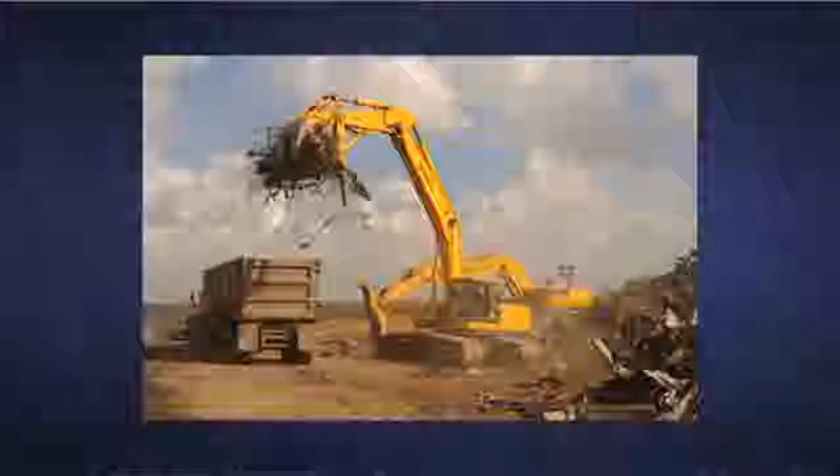Was the structural steel from World Trade Center 7 preserved, documented, analyzed according to standard procedures for investigating engineering failures? Hailing the collapse study as an assessment rather than as an investigation has allowed valuable evidence in the form of the tower's structural steel to be destroyed. It is a steel that holds the primary key to understanding the chronology of the events resulting in the collapse.

When did you become aware that the steel from the World Trade Center was being sold off? I think it was on the order of a week or so before we arrived on site, on October the 5th, I believe it was. So in other words, the city was selling or was disposing of material within 2 weeks of the actual event?

I believe I was the first one to find out that the steel is being recycled. New York Times reporter Jim Glanz told me 2 weeks after the collapse, and I tried to contact the city, and also New York Times reporters tried to make sure we could have access to the steel to do research. It was not happening. I just think there's so much that has been lost in these last 6 months that we can never go back and retrieve, and it's not only unfortunate, it's borderline criminal.

400 truckloads per day of material were taken away from the World Trade Center site and sent to China for recycling. There were laws violated in the destruction of that evidence. And for the American Society of Civil Engineers to ignore those events is extremely disturbing and is a violation, in my opinion, of their professional code of ethics.

It was contrary to the way all investigations are done. If an airplane crashes, they seal off the entire area, nobody touches anything, they move it to a secure location, and they reconstruct an aircraft. Normally, when you have a structural failure, you carefully go through the debris field, looking at each item, photographing every beam as it collapsed and every column where it is in the ground, and you pick them up very carefully and you look at each element. We were unable to do that in the case of Tower 7.

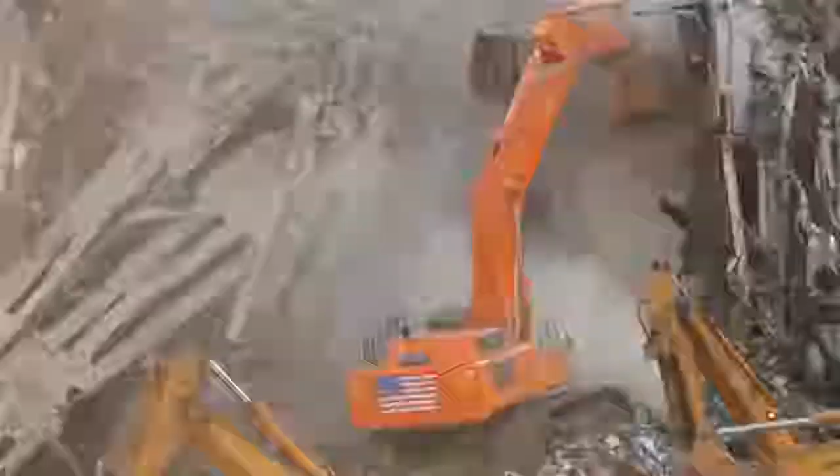We have preservation of evidence, we have spoliation of evidence, there's all kinds of basically standards that you don't destroy evidence. We don't have the real story on what happened because there wasn't a proper investigation done.

As reported by the New York Times, engineers were baffled by the collapse of Building 7. Since no steel frame high-rise has ever completely collapsed due to fire, how are we to understand this mysterious event?

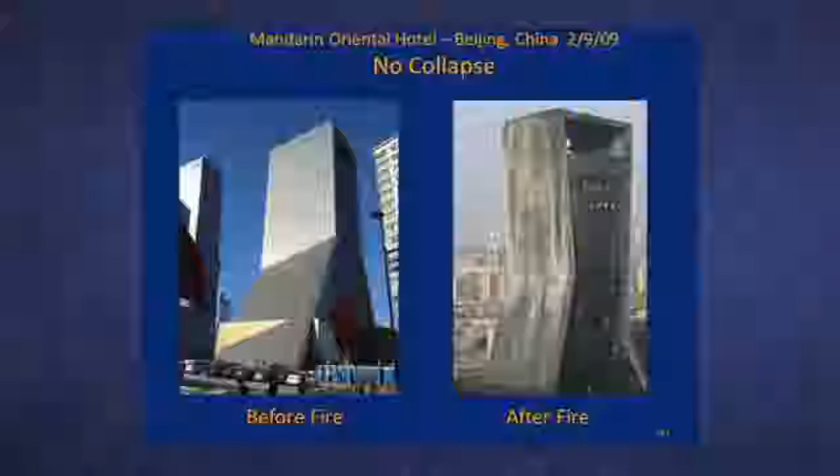High-rise buildings simply do not collapse due to fire. There has never been, until 9/11, an experience where a steel frame high-rise building completely collapsed. There have been fires that burned longer in similar structures without any collapse.

It's not that steel melts in a fire. In fact, normal fires are not hot enough to melt steel. Even if you were to use an unusual fuel like kerosene, you cannot achieve temperatures hot enough to melt steel. But what happens is it starts to lose its strength, and as it loses its strength, it starts to sag.

In my previous career as a firefighter, normally you'd never be afraid to go into a Type 1 building because they're not combustible, and you would just charge at it and put the fire out. Never in my training were we ever taught that these types of buildings could just collapse in on themselves.

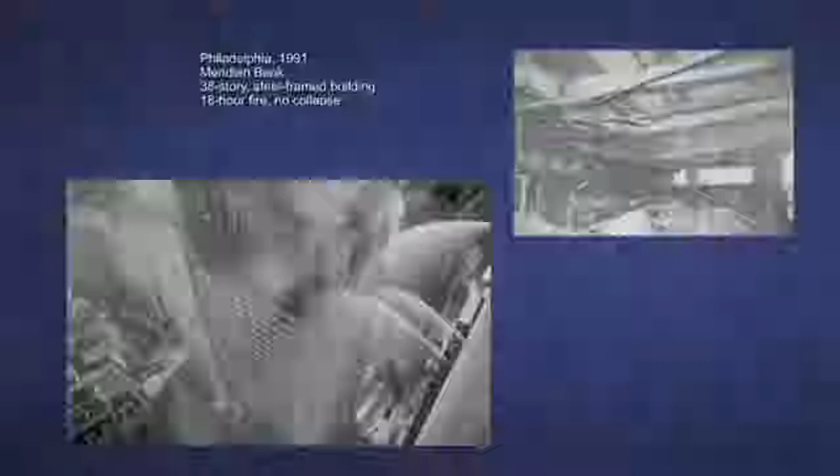There's definitely much more going on than just fire. The World Trade Center 7 building reminds me of the Meridian Bank building in some ways in Philadelphia. The Meridian Bank building is a 38-story skyscraper that burned for 18 hours in 1991, suffered extensive damage from the fire, but did not collapse.

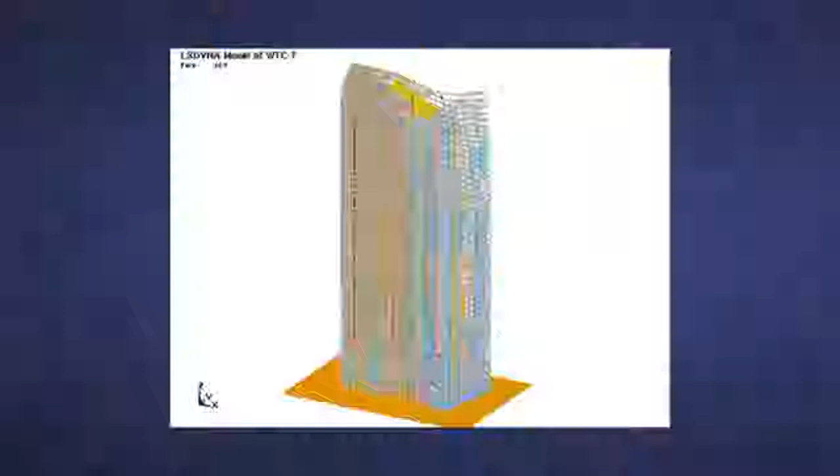We've never had a steel-framed skyscraper collapse in the United States or internationally. So there's no precedent. As NIST tells us, this collapse mechanism, starting with thermal expansion that worked its way upward and outward through the building, in a matter of seconds—there's not enough time for the building to collapse the way that NIST tells us it collapsed.

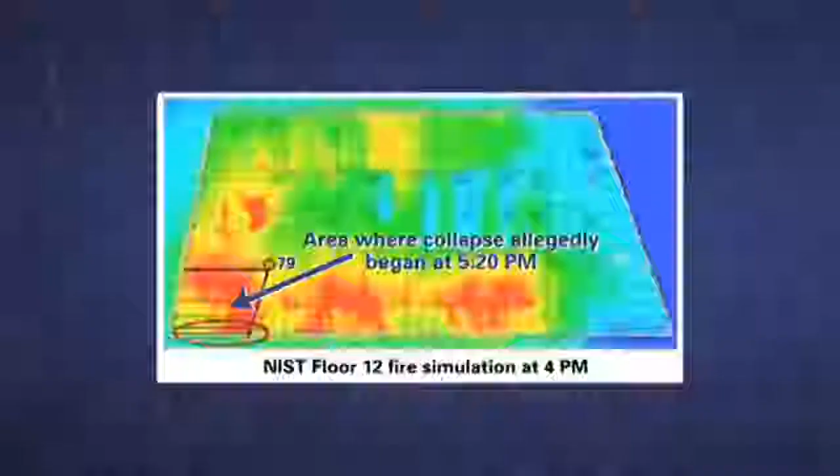NIST claims the fires were very large, very hot, and long-lasting, when in reality, observation, which has been researched by many people, shows these fires did not last very long. They were not in the locations where NIST claims they were at given times.

I'm a fellow of the American Institute of Architects. For the 40-plus years that I've been practicing architecture, I've designed a variety of buildings from small houses to high-rise office buildings. Some of the high-rises I've worked on are 1 Shell and 2 Shell here in Houston. I was project manager for a 22-story office building in Akron, Ohio.

Later in the day, when World Trade Center 7 collapsed, they had already shown us pictures of a few fires in that building, and I mean, they weren't even raging. How could that cause a building to collapse as if it were imploded? Couldn't happen.

According to lead investigator Shyam Sunder of the National Institute of Standards and Technology, NIST, World Trade Center 7 collapsed at freefall acceleration for more than 100 feet of its fall. What does the speed of the collapse reveal to us? Essentially, in less than 7 seconds, Tower 7 came down upon itself.

It's just like taking your car keys out and dropping them—that's how fast the building came down, for over 100 feet. And the only way you can get that is when there's zero resistance. So what we're looking at is a building just coming straight down, falling right through itself with zero resistance.

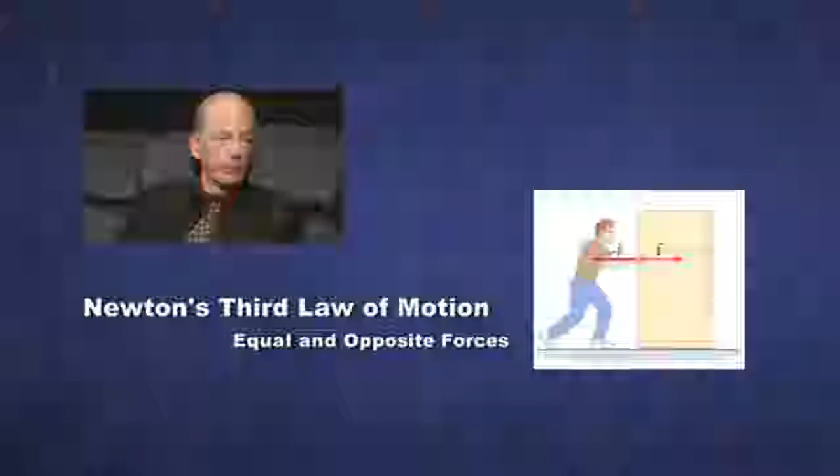The building didn't disappear, so the building can fall for 100 feet at free fall speed. That's impossible. That's a violation of the fundamental law of physics that says that for every action there's an equal and opposite reaction.

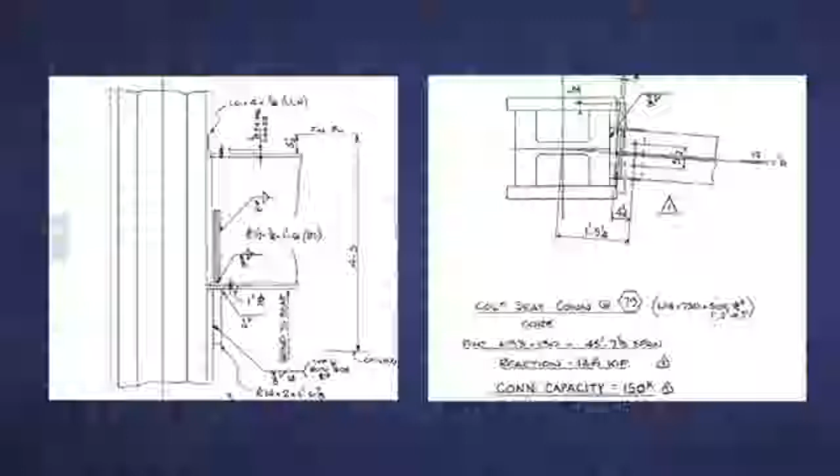If floors fall, they tend to fall and are braced by the floor directly beneath it, and there's some delay there. The connections are designed with a safety factor of 1.5 to 3 times the failure load for the member. This assures that the member will always fail first in an elastic mode and then a plastic mode. The connections failed first, without any of the members exhibiting large deformations or deflections.

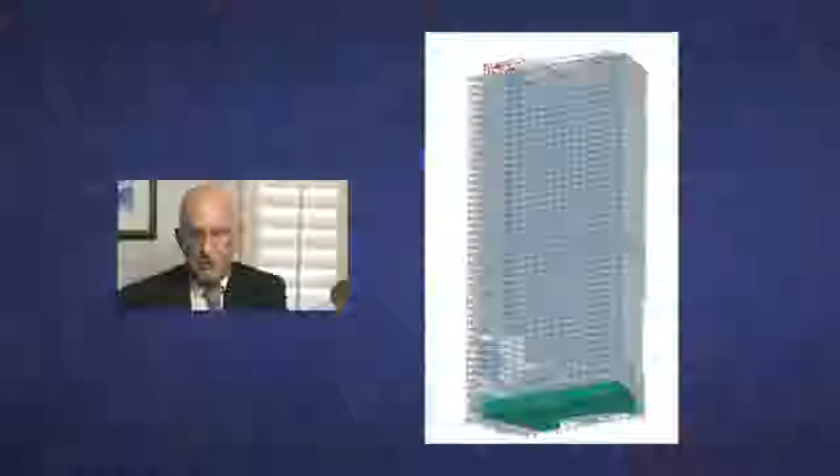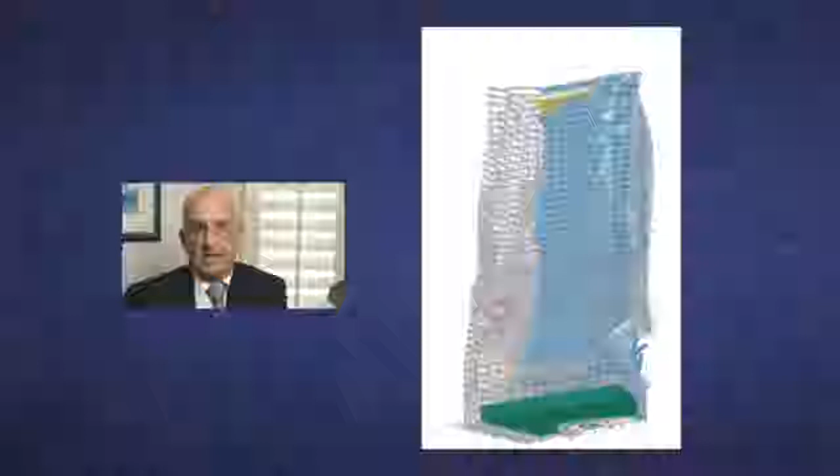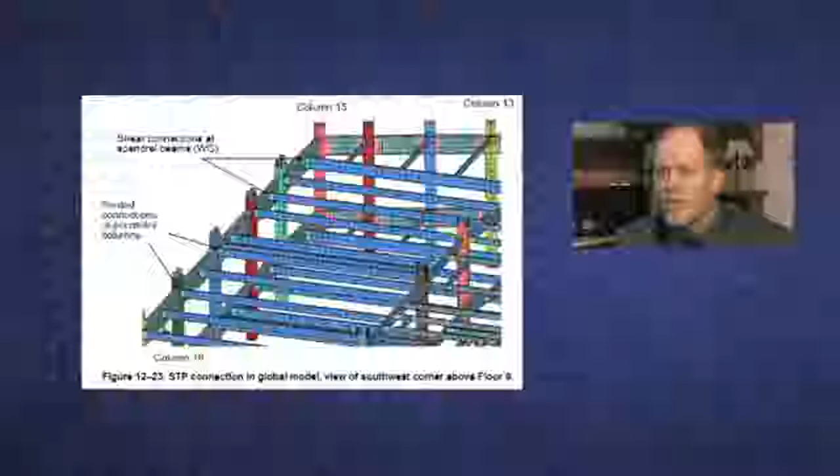Over 400 connections per second had to fail in order for the members to be released and for the structure to descend at almost free fall rate. To fail at the rate that they did, progressively across the building, even if a floor were to collapse, it still wouldn't be able to collapse all of the connections simultaneously at the rate that it did without secondary explosions.

We might anticipate that an unevenly damaged building would fall over. Yet, videos of the collapse of Building 7 show a fairly symmetrical fall. How do we make sense of this? The exterior of the building comes down fully, symmetrically, and at one time.

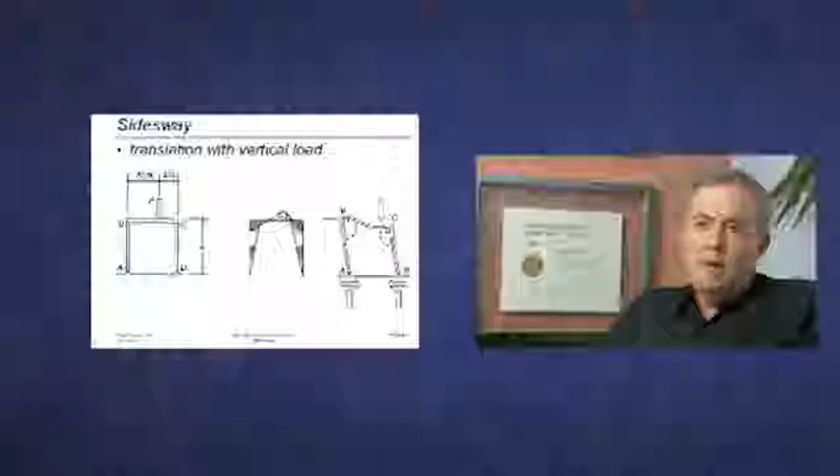Both sides of the building come down completely. This is fully indicative of full structural support being removed for at least 8 stories. That could not happen by fire. If the buildings had come down by fire, we would have seen a more natural progression of collapse, and clearly a more asymmetrical pattern should have been present.

The symmetry is the smoking gun. It cannot happen that when you have asymmetric damage, you will get a perfectly symmetrical collapse. The exterior columns on the outside as well as on the inside at the bottom would have to be severed almost at the same time.

I worked for Controlled Demolition Incorporated, CDI, the top-rated explosives demolition firm in the world. As an explosives loader, my job was to place explosives in the buildings to prepare them for demolition. I was licensed while in New York by the New York Fire Department to handle explosives. I worked on major projects such as Seattle Kingdome, the Three Rivers Stadium, Philadelphia Naval Hospital, and Keyspan gas holders in New York. What I saw, it was a classic implosion.

The center of the core, the penthouse area, starts to move first, and then the building follows along with it. That's another indicator that this NIST report is very suspect. When it's all finished, the outside walls from the lower floors are piled one on top of the other right in the middle of the building, just like a house of cards if it were coming down.

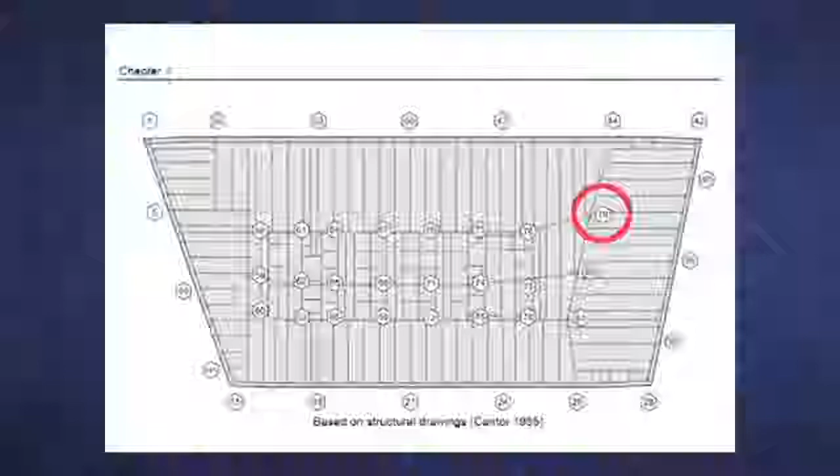As a structural engineer, I don't believe that the failure of one column would normally bring down an entire building in the way we saw World Trade Center 7 come down, because of redundancy, because of all the other columns in the building that were not affected.

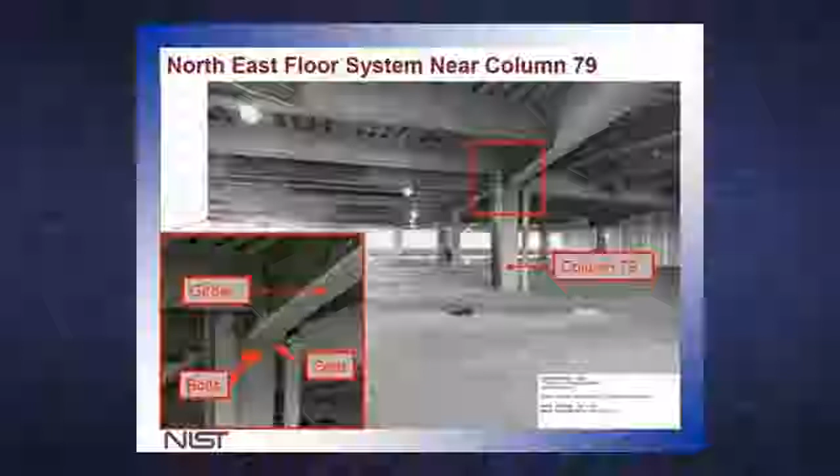According to NIST, the failure occurred at column 79 on level 12. This means basically they're talking about a single columnar collapse or failure that resulted in a total collapse of the building. That just does not make any sense.

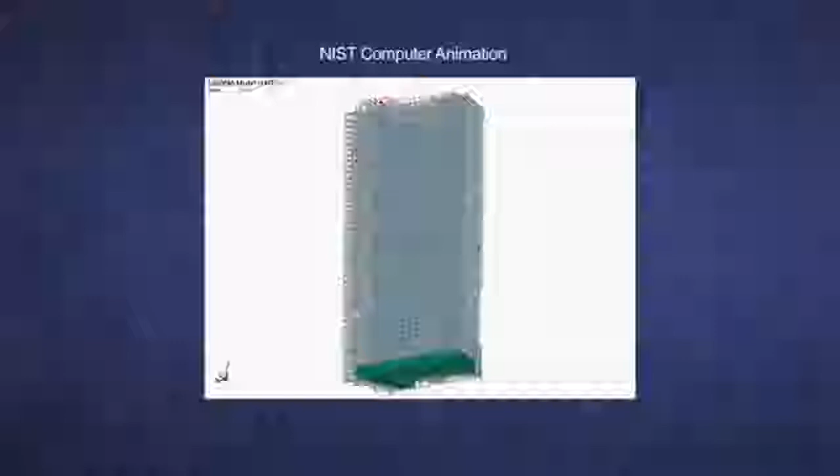NIST provided computer animations in support of their fire collapse theory. But what do independent engineers say about these animations? When you observe the footage of how the building failed, and compare that to the animation of the failure and what you actually observe in reality, I think they disprove their own theories. It is impossible for it to fail the way they said.

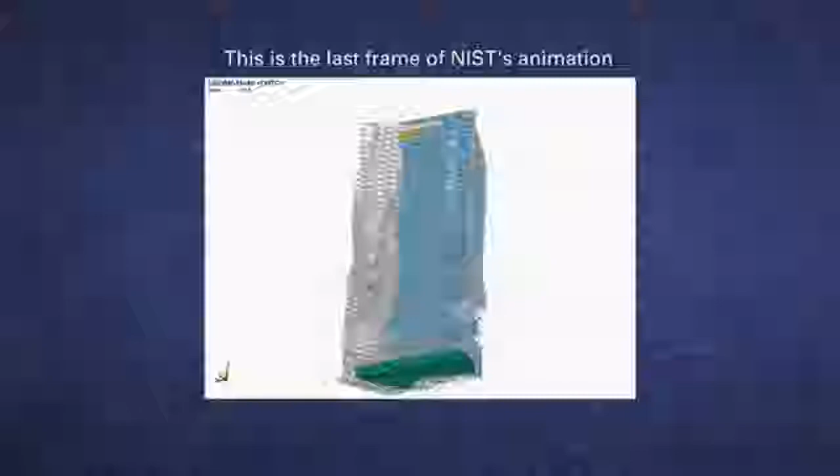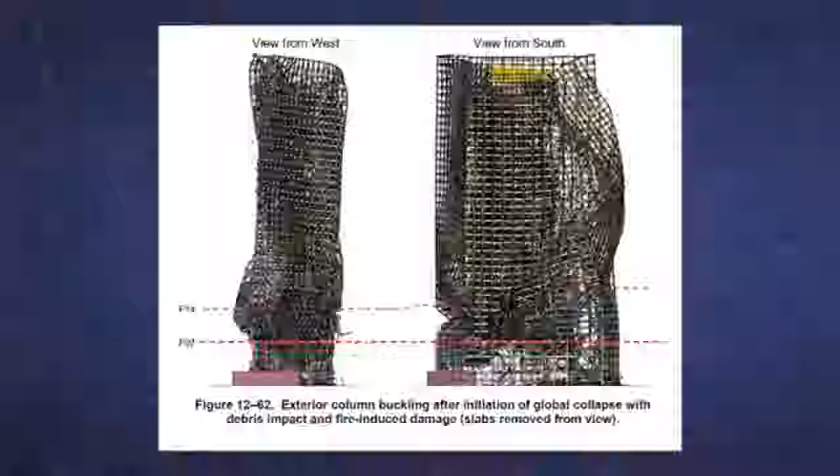The exterior of the NIST World Trade Center 7 computer simulation model, which they put together to try to explain their theory, shows very large deformations which are not observed in the video of the actual event. Yet they don't attempt to explain this in the report. What we're seeing is what would happen in a natural collapse, and what we see on the real video is not a natural collapse.

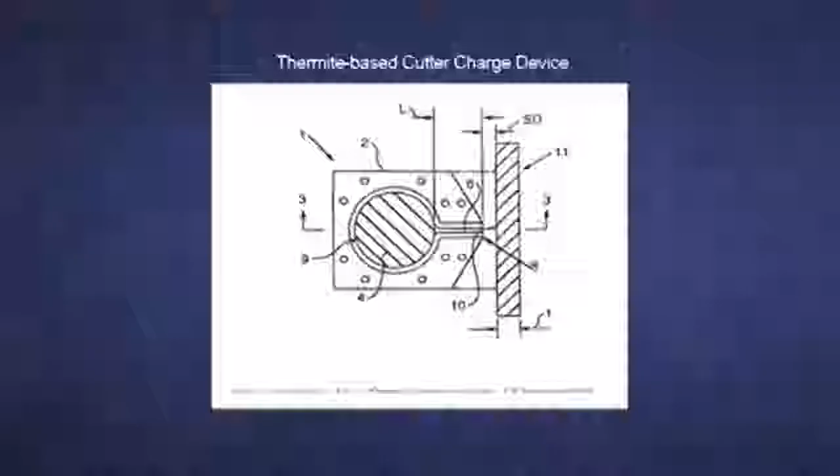There had to be some agent that was destroying the connections in Building Number 7 at 400 connections per second, and the only thing that I can see that would be capable of doing this would be explosive devices at the connections. This is why I think there has to be a new investigation to find out the real physical causes for all these members to act in an atypical fashion.

How could it possibly jeopardize public safety to tell people in the industry, engineers who were responsible for designing these buildings, how this failure could occur?

Science is never secret when it's done right. Science is a way of finding out that is self-correcting and involves many people. Science isn't science unless it's published, unless it's openly published and made available for criticism.

The explanations from FEMA and from NIST don't add up, but there is enormous circumstantial evidence, and actually physical evidence as well, that would lead us to a different conclusion. And the conclusion is controlled demolition. A building cannot do free fall with a huge steel structural system in place to support it without it being blown up. That's the only way it could come down at free fall.

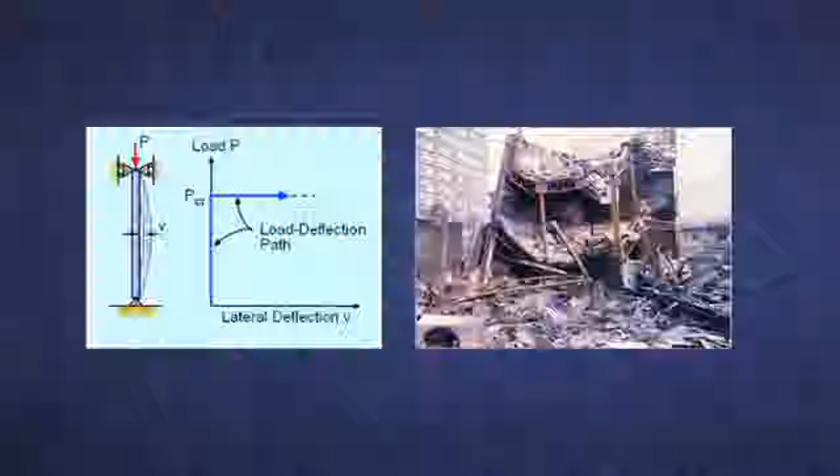The basic philosophy of building codes in the last 75 to 80 years has been to ensure ductile failure of members to provide for public safety. Under this philosophy, overloaded members will deform plastically beyond the elastic range of the material, with increasingly large deformations and deflections. This gives rise to large deformations that are visible and apparent to the occupants of the structure.

It would gradually twist and bend and give people plenty of time and safety in getting out of the building. I would not have expected the whole building to just give in at once, and I thought it rather odd that they fell almost perfectly in very similar ways. It seemed odd that lightning would strike twice. And it certainly would stay in the damage zone. It would not drop down through 80,000 tons of insulated, undamaged structural steel and do it in 12 seconds.

NIST claimed that the upper section of each tower crushed the lower section. However, when you watch video closely, in the case of World Trade Center 1, you'll see that the upper section disintegrates itself. It appears to be a controlled demolition of its own of the upper section. The top section pushing on the bottom section is going to meet equal forces as it goes. Both sections are going to be demolished at the same rate, so by the time you've crushed 15 stories below it, the top 15 stories are also going to be crushed.

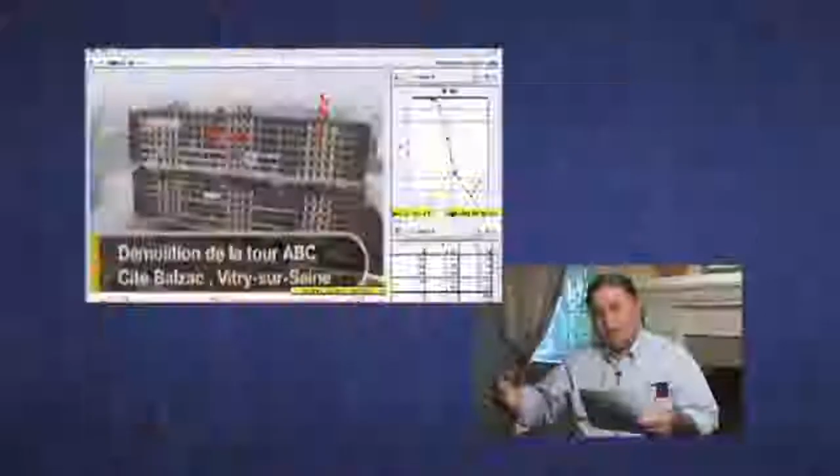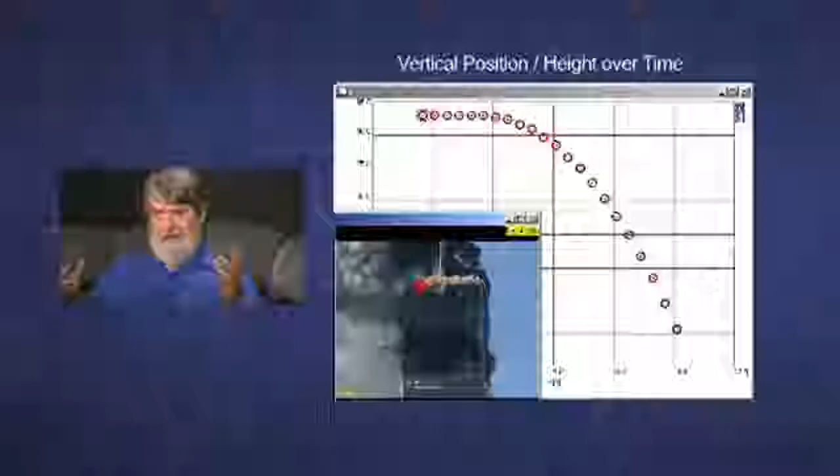There are demolitions done in France using what we call the vérinage technique, where they take out a couple floors worth of columns with hydraulics. They take the columns out and let the upper section of the building drop 2 full floors. When it impacts the lower section, there's a very definitive, observable jolt, deceleration, and velocity loss. You're looking for a jolt - if this thing actually comes down and hits, you should be able to see the point at which they impact, because it would slow down the motion of the falling block. It never slows down. It accelerates the entire time. And that was extremely significant.

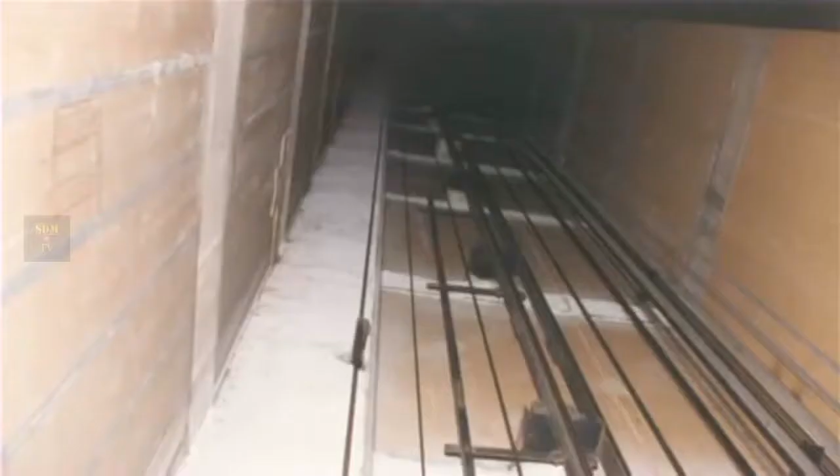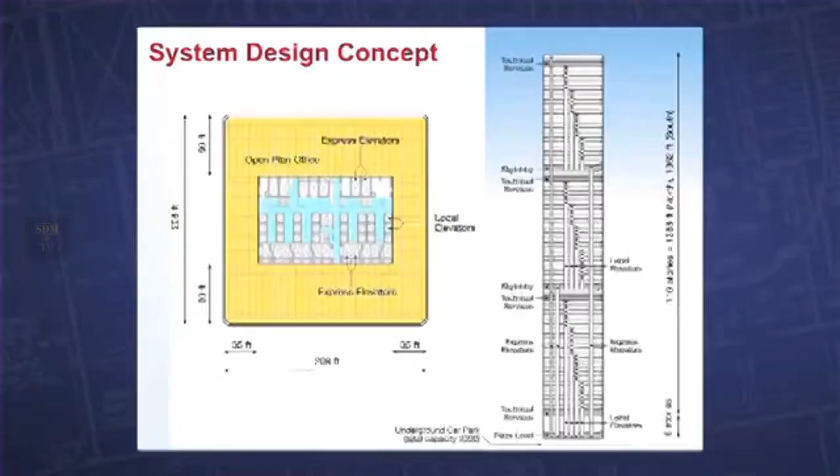I was very familiar with the Twin Towers elevator systems. I actually rode up and down elevator shafts on top of a car going 1,200 feet a minute. You could imagine the experience. Before the tower started collapsing from the top, the antenna started to fall, and the antenna, of course, was over the middle of the elevator shafts. I'm very familiar with the interior structure that surrounded the elevator shafts and the accessibility which the elevator companies had 24/7.

The only way that I can see that the towers could have collapsed is that the interior columns were compromised. It wouldn't be a problem once you gained access to the elevator shafts. Then a team of loading experts would have access to all the core columns and beams. The rest could be accomplished at that point by just the right kind of explosives for the job at hand.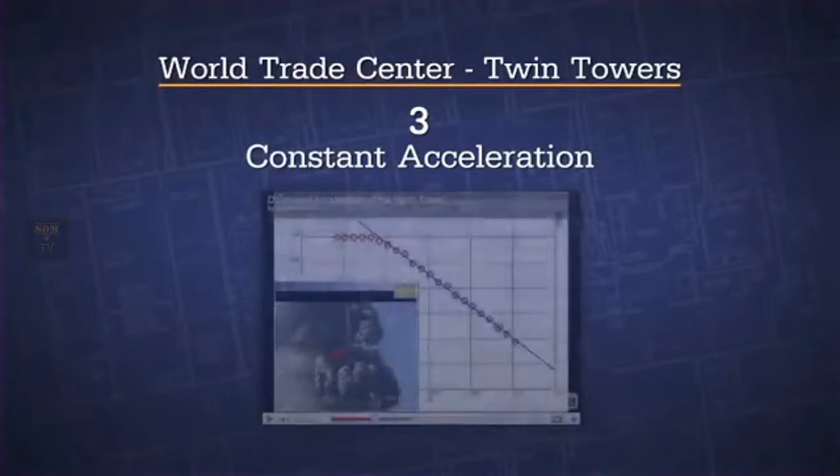NIST, the National Institute of Standards and Technology, acknowledges that the towers came down at essentially free-fall acceleration. What are the implications of that admission? Measurements have indicated that Tower 1 collapsed in about 11 seconds and Tower 2 collapsed in about 9 seconds. This is essentially the rate at which free fall would happen.

From what I understand, the buildings actually accelerated as they came down, meaning they were not getting resistance from these massive columns in the center of the core of this building. The core of this building was very heavy - they're huge columns, huge. Does this block accelerate straight down, or is it picking up speed downward continually? It doesn't slow down, it just continues to gain speed.

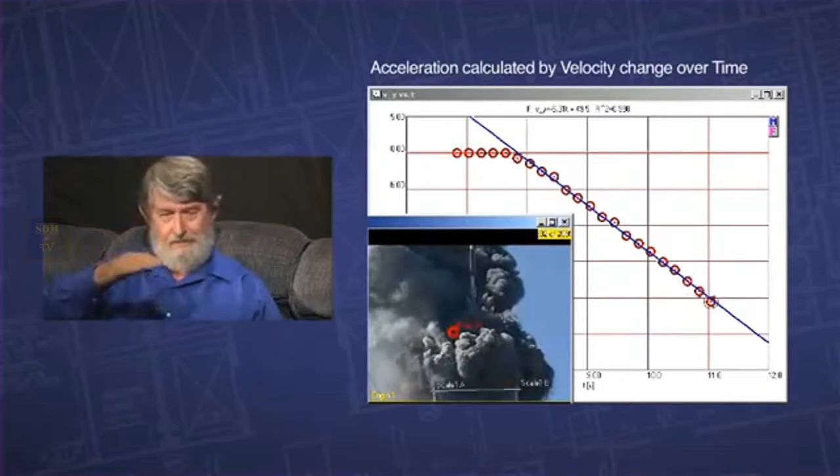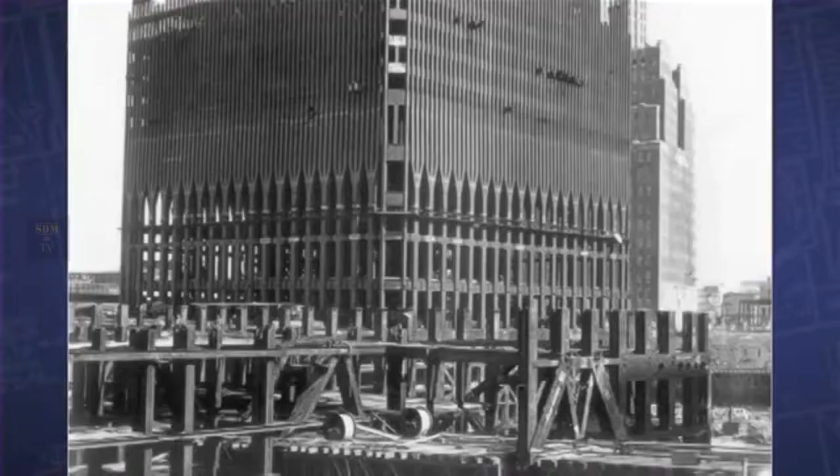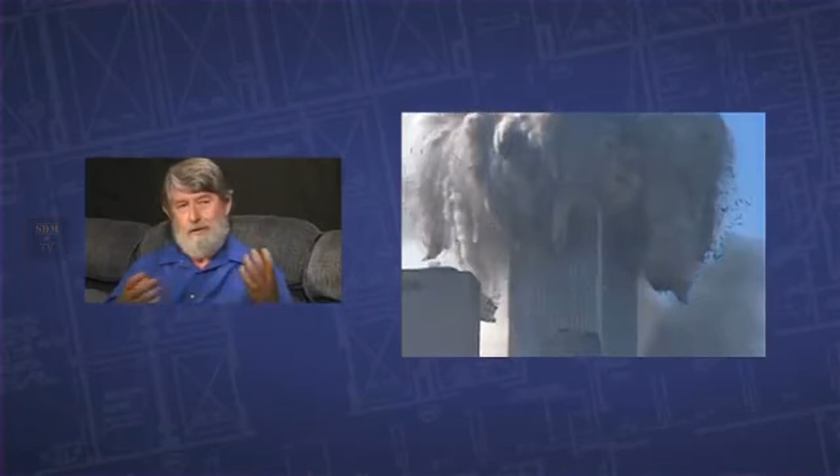The Twin Towers could not have come straight down through thousands of tons of structural steel, through the greatest resistance. There are columns of steel around the exterior of the building and within the core, all there to prevent the thing from falling down. So even if something falls on it, it's not going to immediately just go pop, pop, pop, pop, pop, floor by floor. If it's going to collapse, it's going to take some time to weaken the structure below it. This structure was capable of holding 3 to 5 times the weight, and here it is falling through it with the resistance of only 1/3 of its weight. Roughly 90% of the resistance has been removed.

What's happening is the top section is not crushing down the lower section like a pile driver, which is the picture that NIST is basically painting. It's actually falling into material that's already been pulverized, that's offering very little resistance.

It's just coming down through pre-pulverized material. The buildings fall at a speed which can only occur if the vertical structure has been removed. Structural connections not only had to fail nearly simultaneously, but in sequential order. I was shocked at how the buildings collapsed, but expected that they would have come down much slower, that they would have tipped over. The whole thing did not make sense.

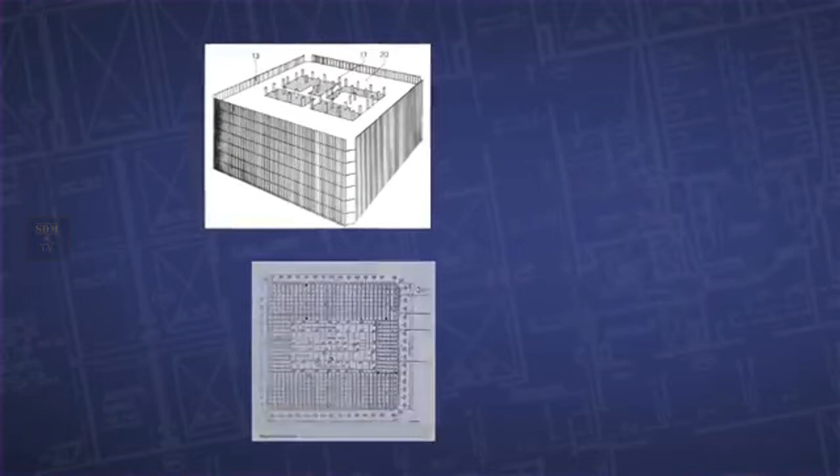Ever since then, I had a hard time believing that the fires did drop those buildings. The area below the damage zone, where the planes flew in and where the fire was, those 80 or 90 stories, 80,000 tons of structural steel, was not damaged in any way. Yet you stood there and watched it destroy itself, wiping out floor by floor all 287 structural columns as if they didn't exist underneath the damage zone.

Over 100 first responders reported sounds of explosions and flashes of light at the onset of destruction of both towers. These were not discussed in the NIST report. What did these eyewitnesses actually see and hear?

As we were getting our gear on and making our way to the stairway, there was a heavy-duty explosion inside the lobby. We stuck on the stairs for a while. We finally got down to the lobby. Then we get to the lobby, it was this big explosion. There were numerous secondary explosions taking place in that building. There were continuous explosions. There was a secondary explosion, probably a device either planted before or on the aircraft that did not explode until an hour later. Then there were some secondary explosions and then the subsequent collapses.

It sounded like gunfire, bang, bang, bang, bang, bang, and then all of a sudden 3 big explosions. About 50 consecutive bangs, and it fell down like a waterfall. And we heard the noise associated with an implosion. We heard a very loud blast, an explosion. We heard a loud explosion. At that point, we heard a large boom.

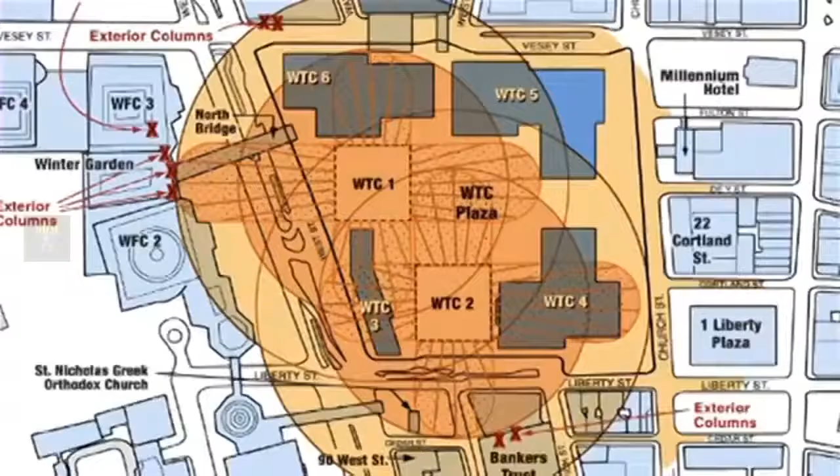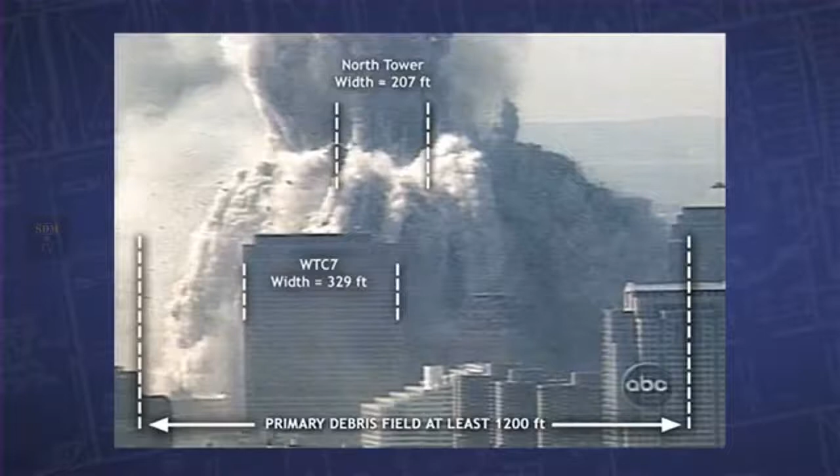The spread of debris in a large radius around each tower shows an outward explosion of material beyond the perimeters of each footprint. This is not expected, and it's not congruent with the reports of our government. Debris was shooting out for hundreds of feet in all directions at 70 miles an hour, leaving the 80th floor of the North Tower on a fairly level trajectory—that's fairly alarming. Large multi-ton beams were hurled hundreds of yards laterally. Gravity works vertically, not laterally.

Something's happening to throw these things horizontally at those kinds of speeds. And here it is, trailing white smoke the whole time. It really is indicative of some kind of explosion.

The individual explosions that I noticed 20, 30, and 40 stories below the collapsing structure—naysayers tend to say, well, that's just air being blown out the windows. But it doesn't really work to say it's just air pressure. These are estimated to be coming out faster than 100 miles an hour. Floors pancaking upon themselves would create gushes of air out the side, but not the kind of explosive force that we saw, throwing I-beams across the street into the windows of other buildings. The ejection of materials, the manner in which it fell, the speed at which it fell, exhibited all the signs of demolitions, and the completeness of the destruction down to their individual elements.

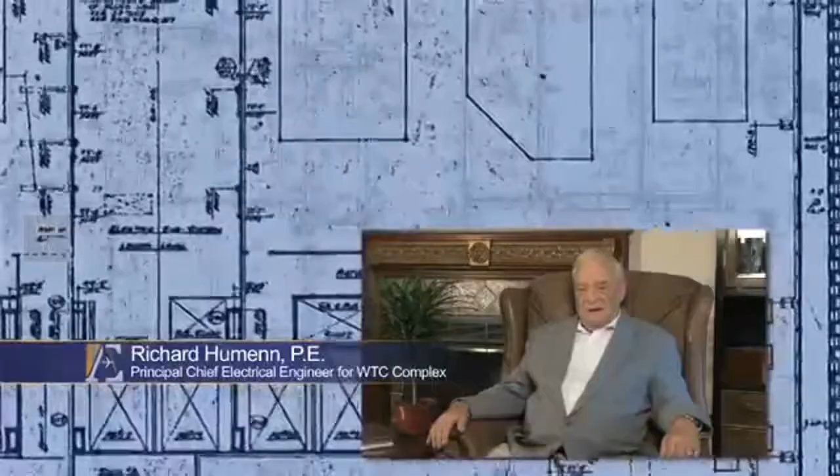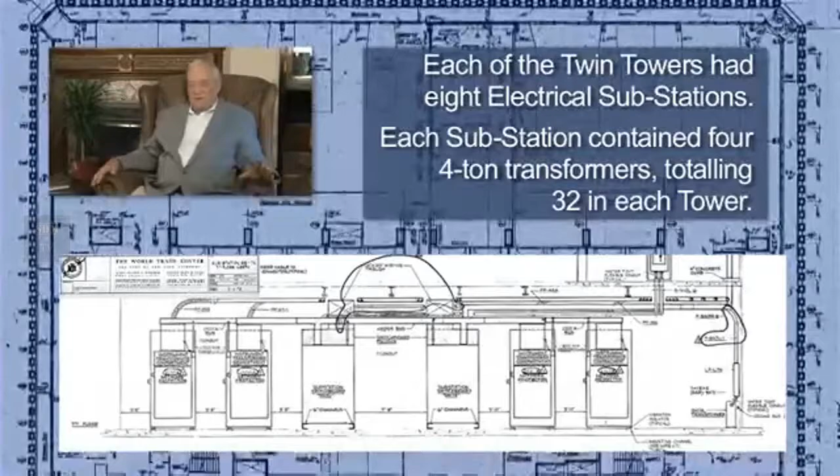There were two substations on the 108th floor, the 75th floor, the 41st floor, and the 7th floor. At those 8 locations, there were 4 transformers in each substation, each weighing over 8,000 pounds. The transformers would not explode on their own—they were air-cooled, dry-type transformers. And yet, after the collapse, there was no evidence of them being found at the bottom of the towers. I wonder why.

As an architect, I would expect to see larger portions of the building floors—the steel decking, the concrete topping—much larger remnants of the structural components of this building. After all, there were 110 floors in each building, and each floor plate was over an acre in size.

We have no explanation of how the concrete was pulverized. It takes an enormous amount of energy. And there's no concrete—there's very little concrete. All you see is aluminum and steel. What happened to the concrete? The concrete was pulverized. I was down here Tuesday, and it was like being on a foreign planet. All of Lower Manhattan, not just this site, from river to river, there was dust powder 2 to 3 inches thick. The concrete was just pulverized.

In its report on World Trade Center 7, which came out in May of 2002, FEMA documents in Appendix C steel that has been melted and even partially evaporated, resembling Swiss cheese. What are we to make of this? This was the size of steel they used in the construction of Tower 7—they didn't use this particular kind of steel in Towers 1 or 2. So that's why we know its pedigree.

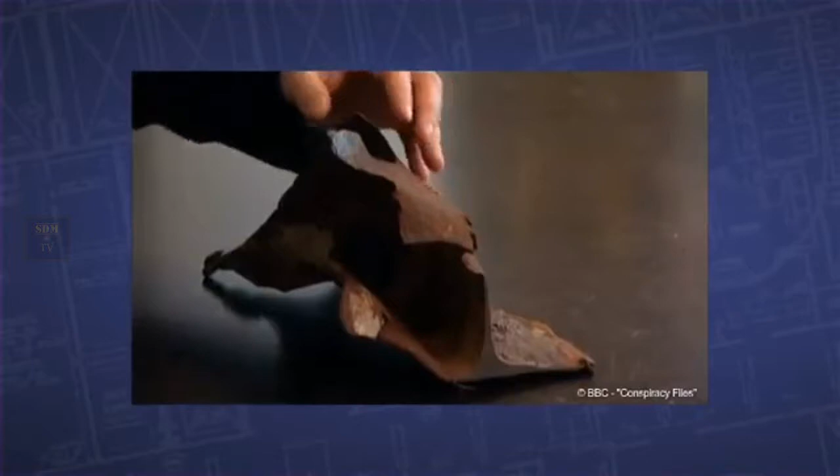It was a surprise to me because it was so eroded and deformed, so we took it for analysis in the lab. One section of steel was kept. How it got to be in its present state was described by the New York Times as perhaps the deepest mystery uncovered in the investigation. There are parts where the entire half-inch of the beam is gone, entirely dissolved right through—something happened to cause the steel to thin and, in some places, disappear entirely. It was attacked by what we determined was a liquid slag. When we did the analysis, we actually identified it as a liquid containing iron, sulfur, and oxygen.

Jonathan Barnett's study, which I thought was very well done and quite extensive, is all documented by FEMA in Appendix C of their BPAT report from May 2002. Unfortunately, it was never used in the NIST report. I'd like to know why NIST excluded the evidence of melting steel. Why is this not included? Why is this forensic evidence not being included in the report?

First of all, let's go back to your basic premise that there was a pool of molten steel. I know of absolutely nobody, no eyewitness who said so, nobody who's produced it.

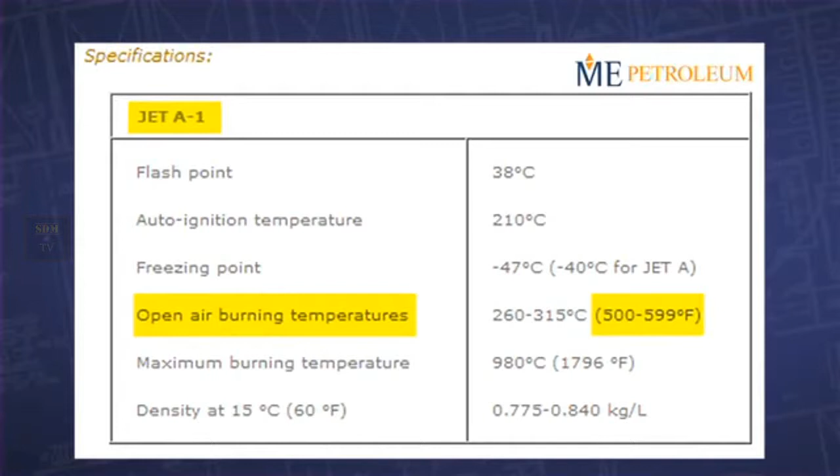Kerosene or jet fuel burns at less than 1,800 degrees Fahrenheit. And molten steel needs at least 2,700 degrees Fahrenheit in order to melt.

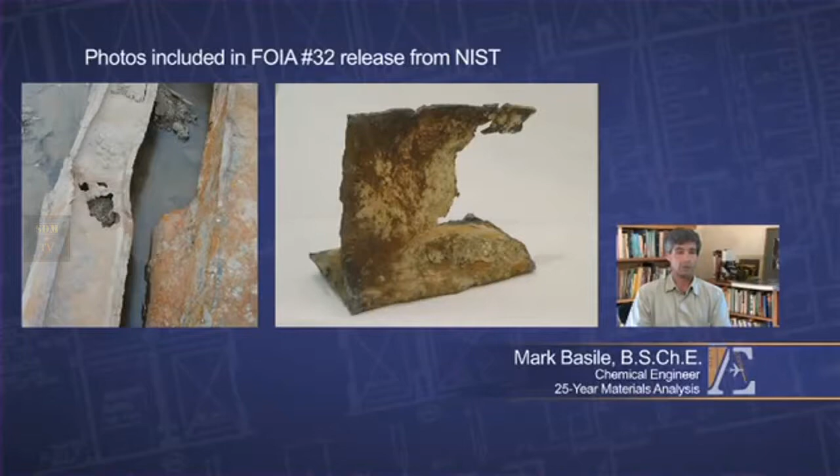There were sections of them that clearly showed melting. They had sections that were thinned away, and there were actually holes through them, and some of the ends were just melted away or even possibly evaporated away. In an office fire, you cannot generate enough heat to melt steel.

And yet we have evidence of molten iron in the microspheres, in the rubble pile, and the metal pouring out of the side of the tower.

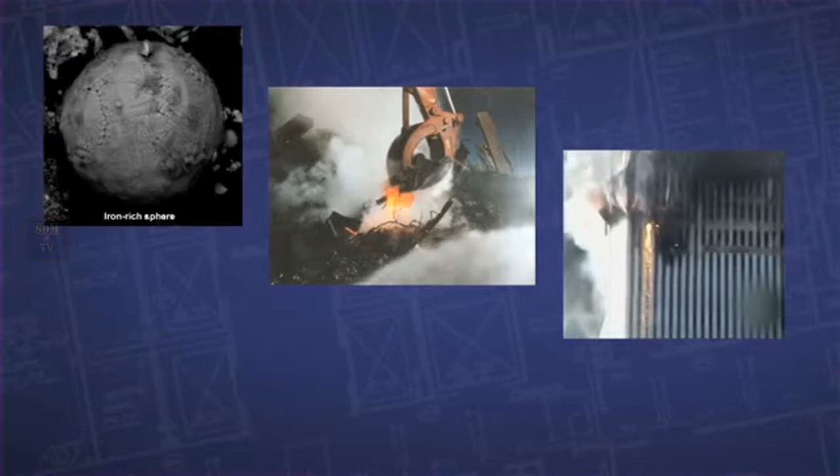I worked in the project engineering department of the casting plant of Alcan, the aluminum company of Canada, one of the largest aluminum smelters on the planet at the time. And in that smelter we turned aluminum oxide into aluminum, molten aluminum.

Molten aluminum is silver. It's not yellow, it's silver. It looks like mercury. The yellow molten metal that I saw pouring out of the south tower is indicative of molten iron. NIST claimed that the molten metal was aluminum.

I mean, it doesn't look at all like molten aluminum. It looks like iron. Molten iron.

The official explanation of what happened there was that the heat from the fire supposedly softened the steel and melted portions of it perhaps, and thereby brought the buildings down.

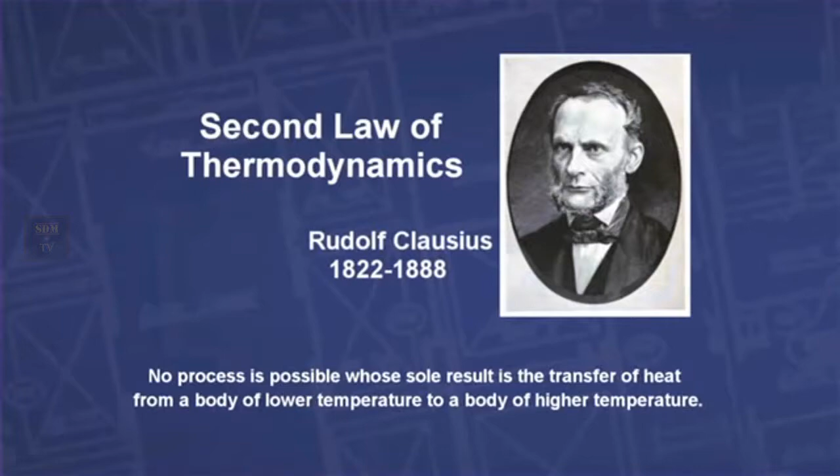Well, the second law of thermodynamics says just like water can only flow downhill when it's poured on the ground, similarly heat can only move downhill. But with heat, downhill means from a region of higher temperature to a region of lower temperature. And the heat flowing uphill from a 750 degree flame to a 3,000 degree puddle of molten steel violated the second law of thermodynamics.

You cannot get a flame hot enough to start the metal to molten, make it molten in the first place so that this other process takes off. I don't know of any mechanism for that.

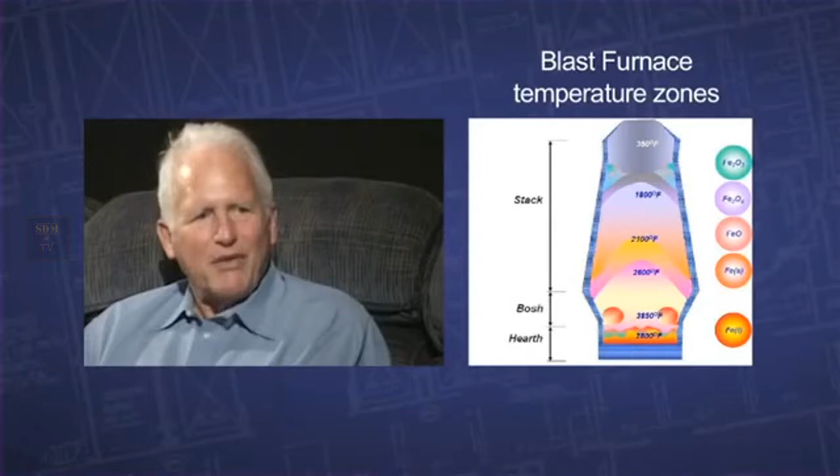The only way that's known that a carbonaceous material can cause steel or iron oxide to turn into a molten metal is in a blast furnace. Yeah, and that's very different than what we had. Molten metal in the basements of all three buildings.

All scientists now reasonably agree that the fires were not sufficiently hot to melt the steel. So what is this molten metal? It's a direct evidence for the use of thermite.

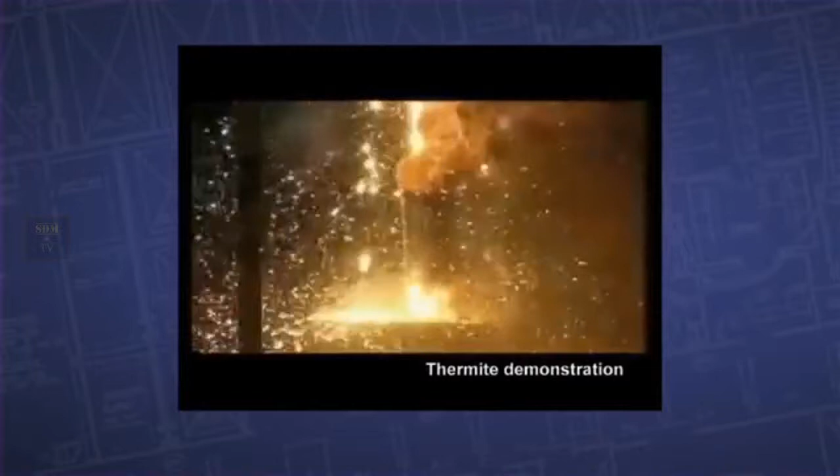An incendiary used by the military, thermite is a compound of iron oxide and aluminum, which when ignited sustains an extreme heat reaction, creating molten iron. In just 2 seconds, thermite can reach temperatures over 4,500 degrees Fahrenheit, quite enough to liquefy steel.

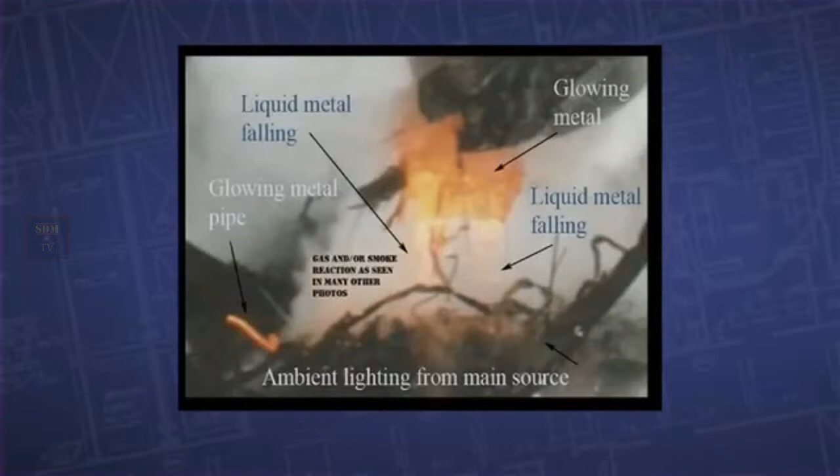We know that open-air fires cannot burn hot enough to melt steel, but metal had melted at the base of the towers. In one piece, I found a pore in the steel that had pure sulfur embedded in the pore, which I thought was very strange.

And so that's when I really started looking for sulfur and finding it in more abundance in some of these phases. There's a government theory that calcium sulfate from gypsum boards was the source of sulfur, and that's wrong.

Calcium sulfate cannot undergo any kind of chemical reaction that produces the element sulfur, and we're not dealing with any kind of compound of sulfur. When we're talking about sulfidation, we're dealing with the element sulfur.

How do you get the sulfur in these pieces of steel or in the debris? And that question is unanswered.

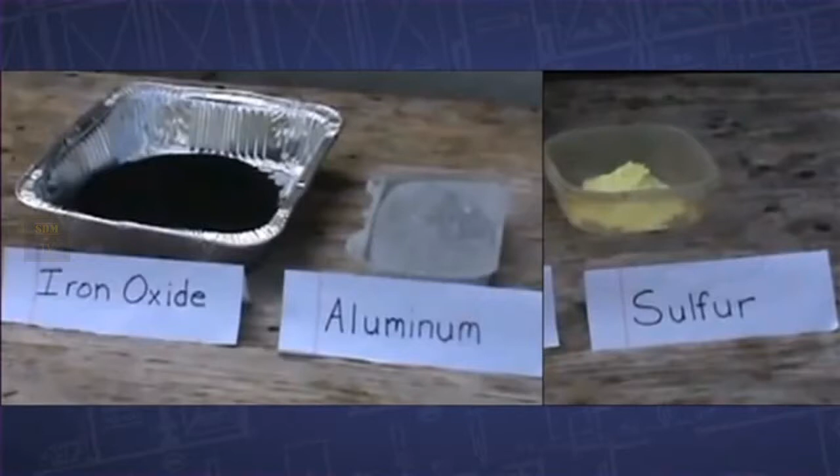There's a version of thermite called thermate, which has sulfur in the thermite. And what the sulfur does is it's sort of like salt on ice. It just basically makes the steel melt at a lower temperature.

And if you do a search on Google for thermite and building demolition, you can find devices that have been fabricated and invented that use thermite for building demolitions.

An incendiary is something which can be used to destroy something by means of heat, while an explosive is something which acts with pressure.

It knocks things apart. In the case of thermite cutting charges, you would have heard far less noise, since they are worked by thermal heating, melting of the steel, rather than an explosive cutting as in RDX charges.

Overflights had detected with infrared camera 1,400 degree Fahrenheit hotspots on the surface of ground zero, and that being there for a week...

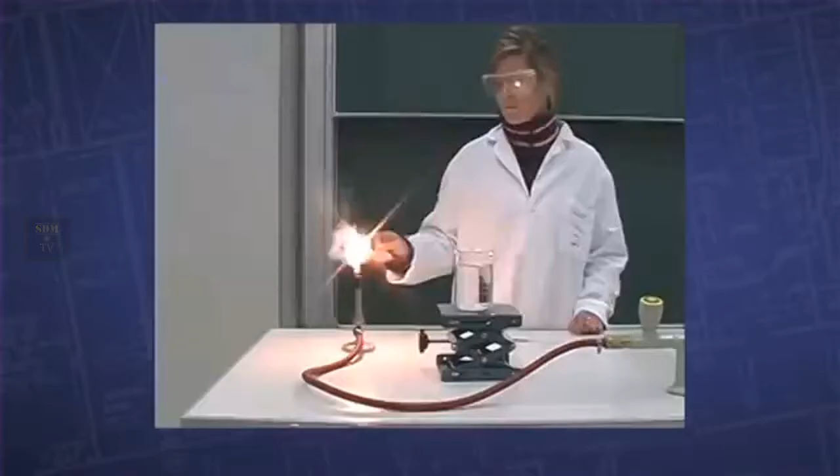Indicates that there was something very hot going on below the surface. So thermite, if it was present at the World Trade Center and created this molten metal that so many witnesses and photographic evidence shows, would also explain potentially the fact that the fires could not be put out at ground zero. The fires lasted for quite a while, but most importantly, they were deep within the pile, where people would expect the environment was oxygen starved. Thermite could explain this because it has its own oxidant within. It's actually the metallic oxide that provides the oxidant to allow the incendiary thermite reaction to occur, even underwater.

As much as 6% of the World Trade Center dust consisted of tiny, previously molten iron spheres. What does this tell us about the temperatures generated in the tower's destruction? When the USGS collected samples of the World Trade Center dust, they found the iron microspheres. So far, the USGS does not have a valid explanation for the presence of these iron microspheres.

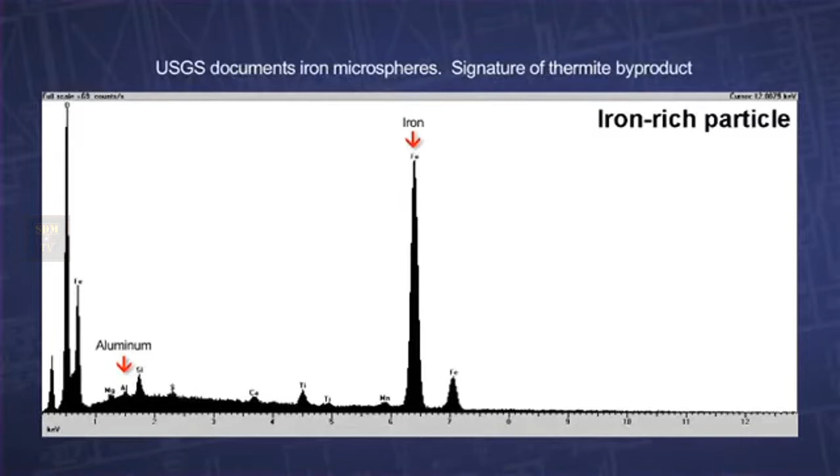So what do the microspheres contain? Iron is the main element, and then it has smaller portions of aluminum, sulfur, a trace of manganese. Most of them are less than about 1/10 of a millimeter in diameter, and they're spherical. They're found in all of the dust blown out of the buildings during collapse, no matter where in Manhattan that dust is picked up.

You must have had a much hotter heat source for you to get 2,700 degrees Fahrenheit in order to melt the iron to get these molten spheres. Your heat source must be something like a chemical reaction, an exothermic chemical reaction that reacts, in the case of thermite, at 4,500 degrees Fahrenheit.

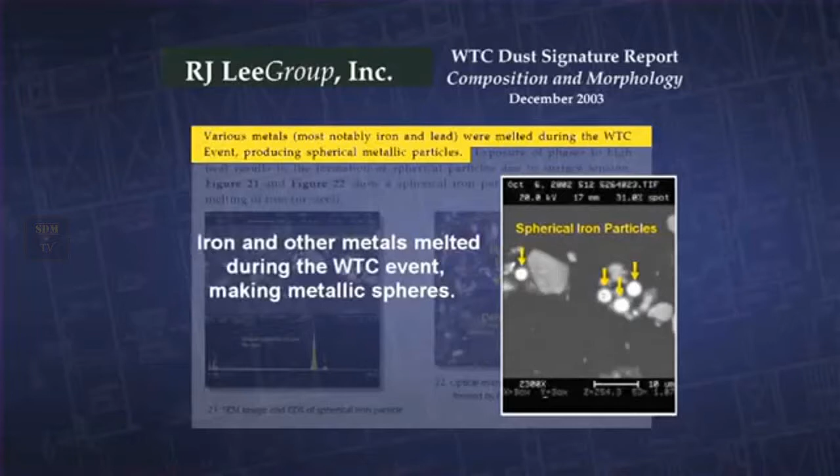My contention, based on finding thermite residue in the dust, is that it happened before. It didn't happen after, in the fires that ensued in the rubble pile afterwards. It's all the characteristics of the microspheres, along with what I see in the attack of the beams that were actually found, that tell me thermite was involved in melting those steel beams.

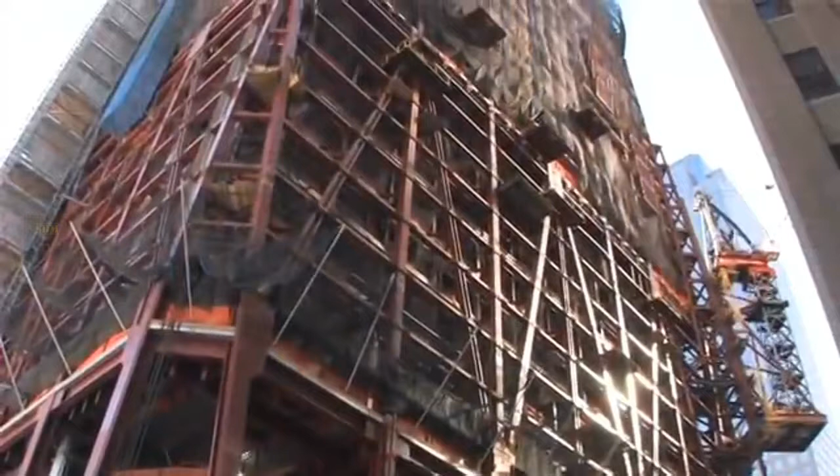Out of the ashes of the World Trade Center devastation rises the Freedom Tower, whose foundation, however, is shrouded in question. For example, in the World Trade Center dust, an international team of scientists find an advanced form of highly energetic nanothermite composites. What is it, and where does it come from?

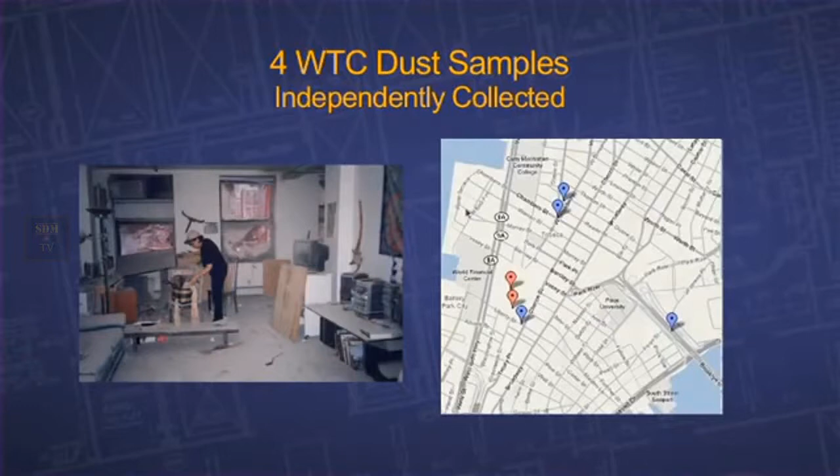In the dust, we found what we characterize as unreacted thermitic material in the shape of some very tiny red-gray chips, which have different properties. Most importantly, some of them are still reacting, and in the reaction they produce molten iron, which is the prime indication of a thermitic reaction. Such a reaction can be used to destroy steel structures. What we have found is a modern version of thermite, which we call nanothermite, which is produced in a different way.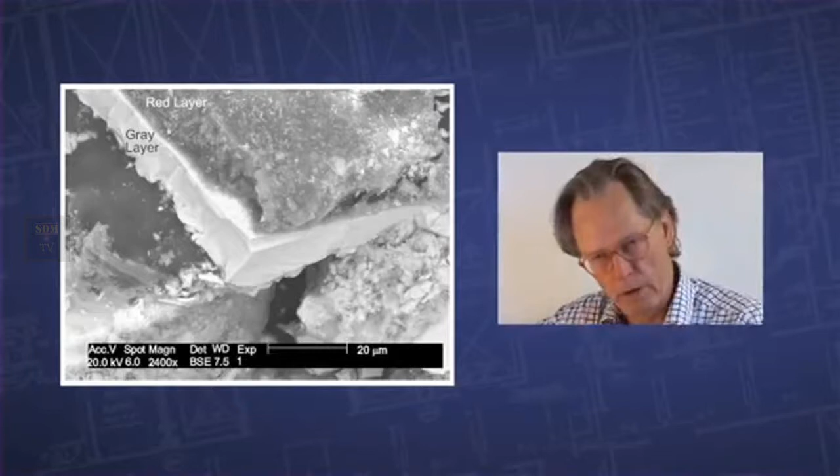It is not just two powders being mixed. The material is actually built from the atom scale up. We call it the bottom-up procedure, which is what you do in nanotechnology. The ingredients are much smaller, which means they're reacting faster and they're more easily ignited.

The primary elements in the red material are aluminum, iron, oxygen, as well as silicon and carbon. The iron oxide appears in faceted grains, approximately 100 nanometers across. The aluminum appears in thin platelets, about 40 nanometers thick. It is the small size of the particles involved in this material that allow us to characterize it as nanothermite.

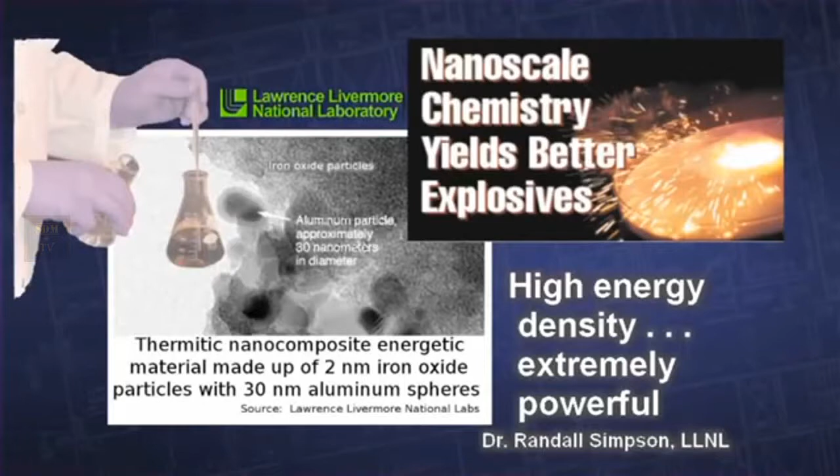In ordinary thermite, the particle size is much larger, and hence ordinary thermite is an incendiary, whereas as the particle size becomes smaller and smaller, it's sometimes called super thermite.

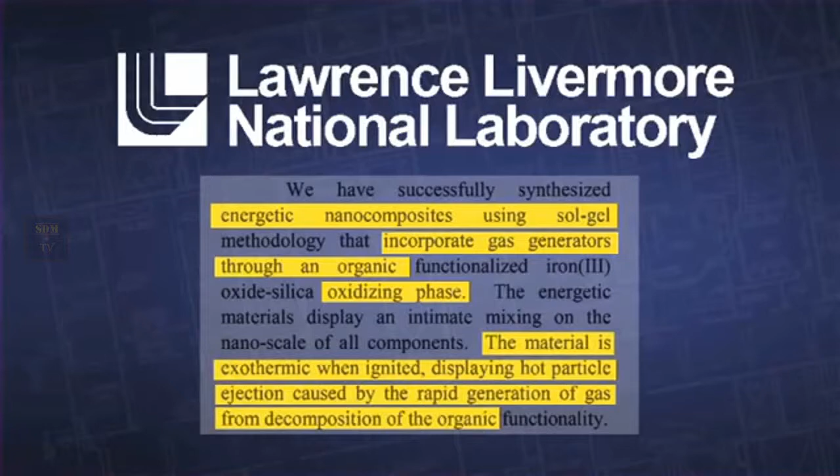This red material contains also a significant amount of carbon, and the formulation of nanothermite as described by National Laboratory publications also implies the presence of carbon, very typically. The organic is used with nanothermite in order to produce gas, and that is a very high pressure gas.

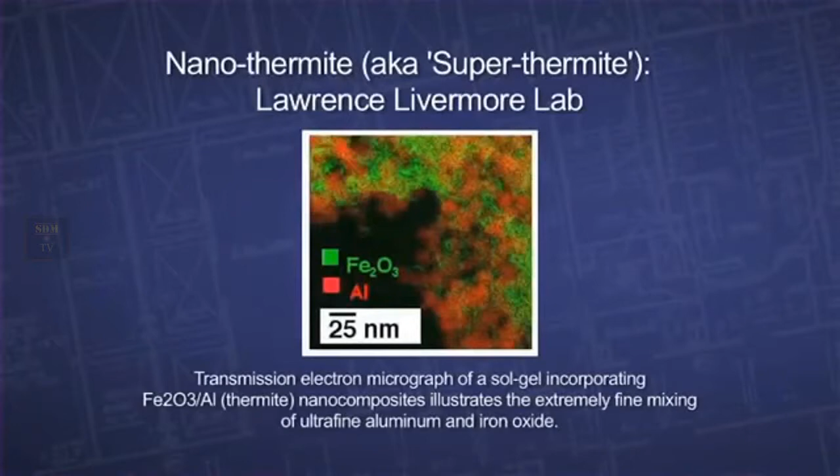We do have descriptions from the Livermore National Laboratory in particular of how they fabricated this material, but to fabricate it is not so easy. This is discussed in our paper in the Open Chemical Physics Journal, published in April of 2009.

So far, none of these papers have been refuted in the scientific literature. That means they are unchallenged in the scientific sense. They stand as an indictment, really, of the official story of 9/11.

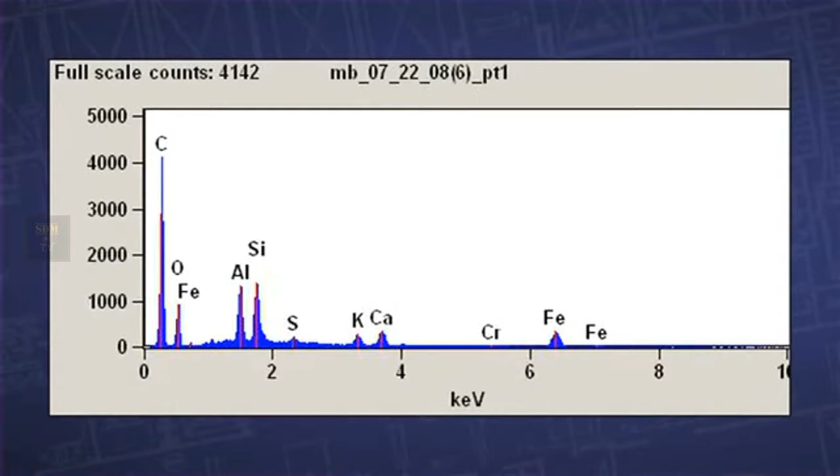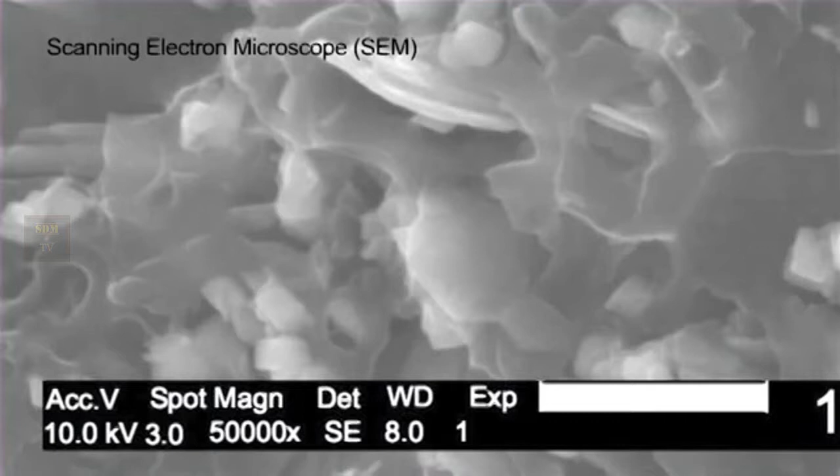I've independently seen thermitic activity within two separate, independent samples of World Trade Center dust. One of the things I'd like to stress about these chips is that they really shouldn't be there. They're not a natural agglomeration of aluminum from the aircraft or materials in the building and iron oxide that got knocked off. It isn't just a haphazard bringing together of iron oxide and aluminum, which are the basic components of thermite. This is a material made up of nano-sized particles that are all very uniform, very symmetrical. This cannot be paint. Paint does not have these exotic properties.

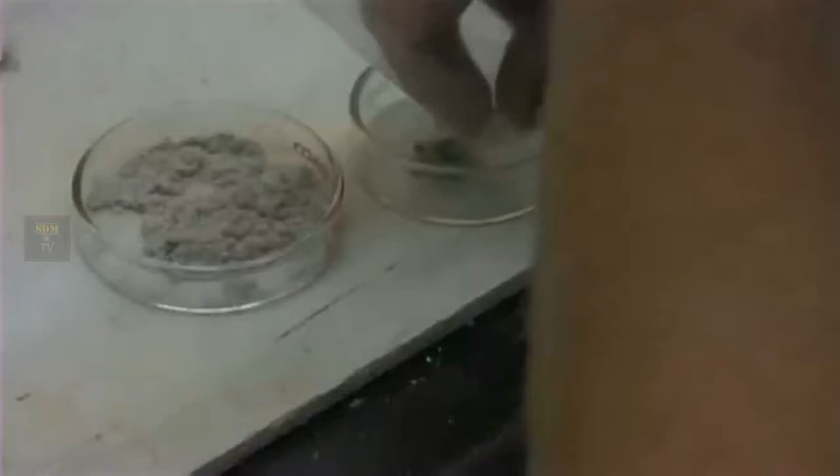It's impossible. There were actually some significant findings in the residue. After igniting these chips in the DSC, we found microspheres. The significance of the calorimeter cannot be understated here. Many of these spheres had the exact, identical, or very similar composition as the spheres that Steve was finding in the dust samples. They were also very similar to spheres found in commercial thermite.

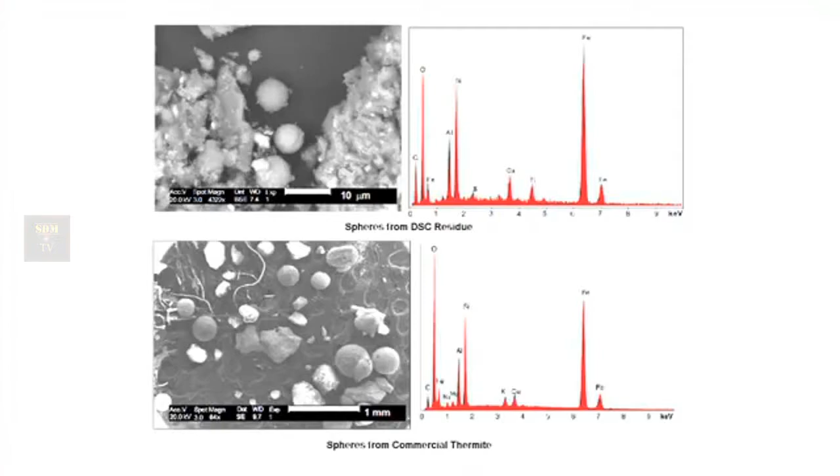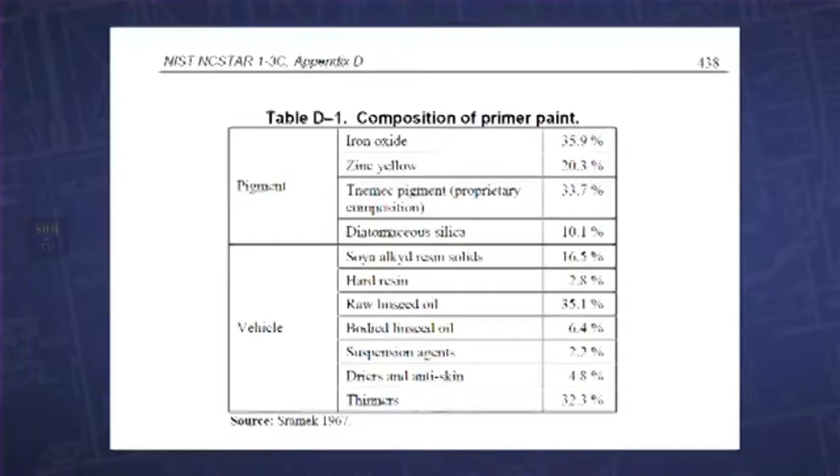There were no microspheres found in the paint sample that had been ignited in the DSC. We also took paint that came off of the WTC steel and looked at that in the SEM, did a compositional analysis, and found that it was not similar to the red-gray chip or the red layer of the red-gray chips. So the red-gray chips are not the primer paint that was used on the WTC steel. This is material of military use that really shouldn't be there.

You don't need to be an engineer or an architect to see what happened to those buildings.

Any honest investigator would be looking at this and looking for explosives and so forth. The NIST investigation didn't go there. They just would not look for explosives. This has been the work of independent researchers, not NIST. So the preconceived notion of NIST is that there's no evidence for explosives, and so there's no point in looking. That is the most unscientific thing you can possibly think of, not to look because you don't expect to find evidence, and in fact the evidence is overwhelming that these red-gray chips are very high-temperature incendiaries. They state these conclusions for which there's virtually no evidence, and then they ignore conclusions that can be drawn from the evidence.

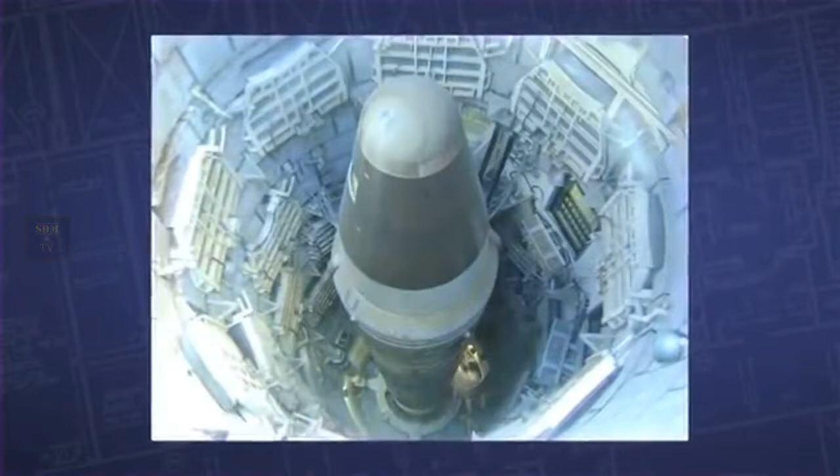That conclusion I come to based upon, first of all, my training and my education, particularly my experience in blowing up major structures that had been designed to withstand blasts. The experience I had gained in the military and as an engineer was irrefutable. I couldn't come to any other conclusion except that those buildings were brought down by explosives.

They fit the profile. The only way a building can accelerate as it collapses is by having pre-engineered, precisely timed, and precisely placed explosives. In other words, controlled demolition. It is my opinion as a former 12 Bravo combat engineer, well trained in the use of explosives, that this building, all three buildings, were brought down as a result of controlled demolitions.

We know we've been lied to about 9/11. We don't know for sure who did it. We don't know exactly how they did everything. And that's why we need a new investigation to find out. We do know that there was a massive cover-up, that there was evidence hidden and destroyed. The American people absolutely need the truth of 9/11.

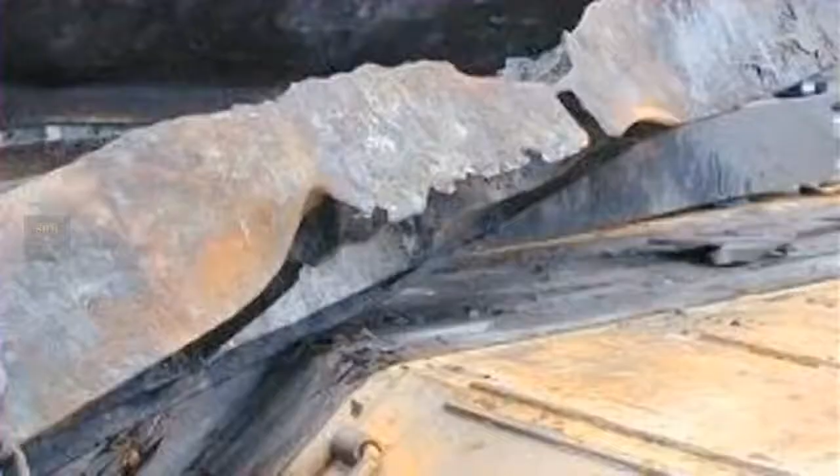When we hear information that contradicts our worldview, social psychologists call the resulting insecurity cognitive dissonance. For example, with 9/11, we have one cognition, which is the official story of 9/11, what our government told us, what our media repeated to us over and over, that 19 Muslims attacked us. On the other hand, we have what scientists, researchers, architects, and engineers are now beginning to tell us, which is that there is evidence that shows the official story cannot be true. So now we've lost our sense of security. We are starting to feel vulnerable. Now we're confused.

9/11 truth challenges the beliefs that our country protects us and keeps us safe, and that America is the good guy. When your beliefs are challenged, fear and anxiety are created. In response to that, our psychological defenses kick in, and they protect us from these emotions. Denial, which is probably the most primitive psychological defense, is the one most likely to kick in when our beliefs are challenged. And it's a very, very uncomfortable state to be in.

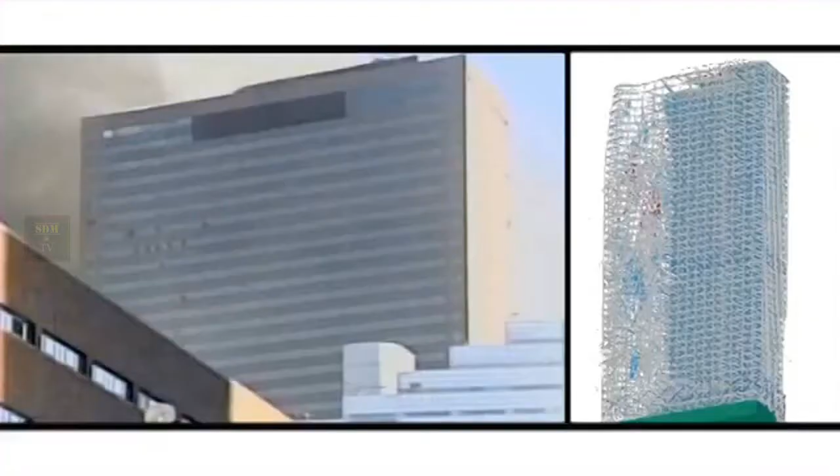And eventually our mind shuts off. Just like when a computer is overloaded, our minds get overloaded. We can't handle it anymore and we shut down. What some of us will tend to do is deny the evidence that's coming our way and stick to the original story, the official story, and try to regain our equilibrium in that way. Another thing we can do is decide to look at the conflicting evidence, be sincere and open-minded, look at both sides of the issue, and then make up our own mind about what reality is.

Here are a few of those spontaneous initial reactions to hearing the contradictory evidence about 9/11. I don't want to know the truth, or I'd become too negative and psychologically go downhill. I'm not sure I want to know. If this is true, then up would be down and down would be up. My life would never be the same. They say this is the way the world works, and I'm convinced this is the right way the world works. 9/11 doesn't fit into that paradigm, so I don't need to look at the evidence. Frankly, I refuse to believe that many Americans could be that satanically treasonous. Someone would have talked. But these are beliefs.

They are not scientific facts. But these beliefs do keep us from looking at the empirical evidence. Whenever we say, I refuse to believe, we can be sure that the evidence that's coming our way is not bearable and that it's conflicting with our worldview much too much.

As I thought about all of these responses, I realized that what is common to every one of them is the emotion of fear. People are afraid of being ostracized, afraid of being alienated, afraid of being shunned, afraid of their lives being inconvenienced, they'd have to change their lives, afraid of being confused, afraid of psychological deterioration, afraid of feeling helpless and vulnerable. And they're afraid that they won't be able to handle the feelings that are coming up. None of us want to feel helpless and vulnerable.